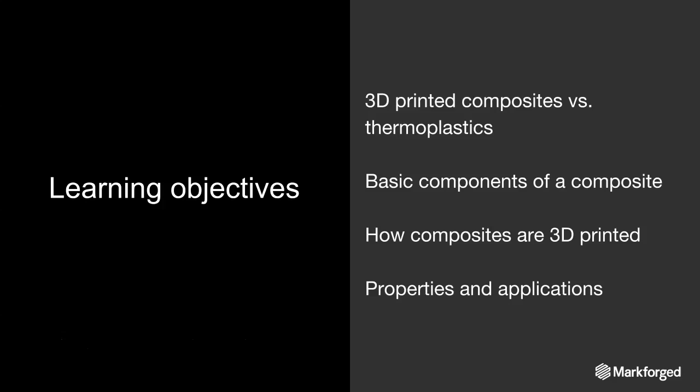And we're going to be talking about 3D printed composites and what advantages they can bring to your production cycle. All right, so by the end of this webinar, you're going to understand the difference between 3D printed composites and thermoplastics, and you'll understand the basic components of a composite. And you'll also be able to describe how composites are 3D printed and be able to name some of the properties and applications of different 3D printable composite materials.

So a lot of you have probably heard of 3D printed thermoplastics. Most materials that are 3D printed fall under this category, and none of them have really proven strong or durable enough for industrial applications, which is why we started 3D printing composites, which outperform thermoplastics in every material property category that you can think of. For example, Markforged's 3D printed carbon fiber reinforcement is more than 8 times stronger than ABS, which is a popular 3D printed thermoplastic. So also included on this graph are nylon and PLA, which are other common 3D printed thermoplastics as well.

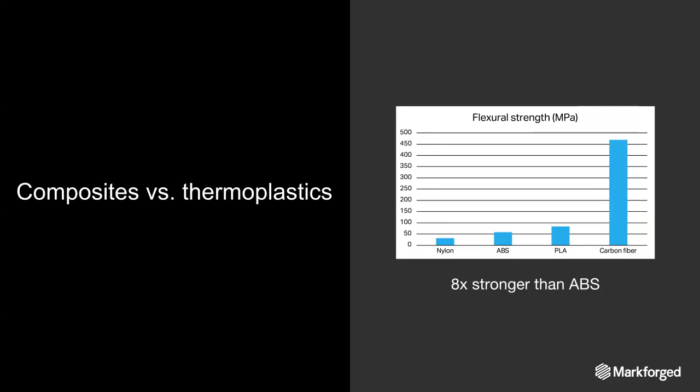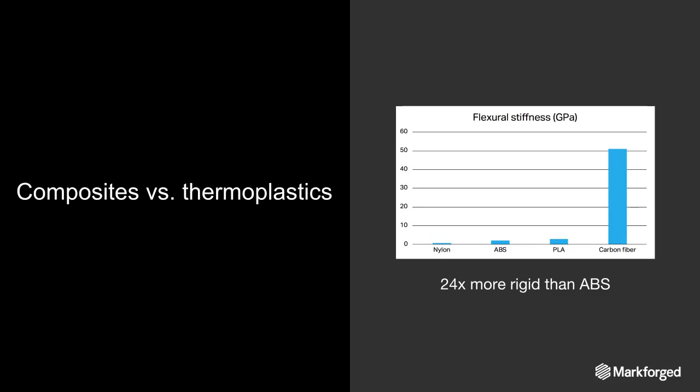When it comes to stiffness, no thermoplastic comes close to matching up with carbon fiber. Carbon fiber is about 24 times more rigid than ABS and around 60 times more rigid than nylon. High strength, high temperature fiberglass, another reinforcement fiber from Markforged, exhibits excellent impact resistance, about 30 times more than ABS. We're going to get more into specific properties of each of these reinforcement fibers later in the webinar.

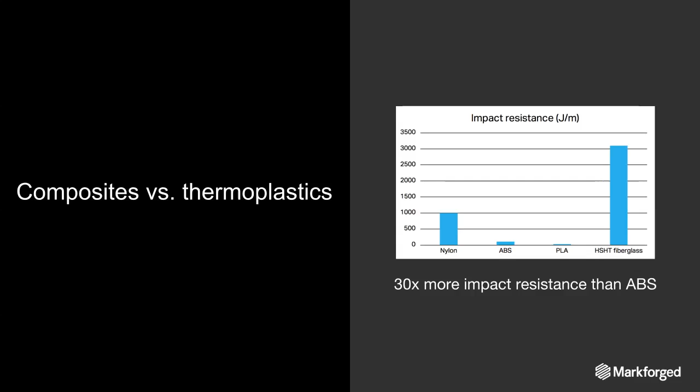But first, I want to cover what I'm talking about when I say composites and thermoplastics and how the understanding that you have already may fit in with the kind of 3D printing that Markforged does. So thermoplastics are plastics that melt when heated and harden when cooled without a change in their chemical properties. They're popular 3D printing materials because they can be easily melted, extruded layer by layer, and then immediately cooled into any desired shape that you want. Most thermoplastics have a relatively low melting point, which makes them easier to print, and are typically very flexible. This picture shows a thermoplastic bending at a 90-degree angle when there's a load applied to the end of it. That really shows that flexibility of thermoplastics.

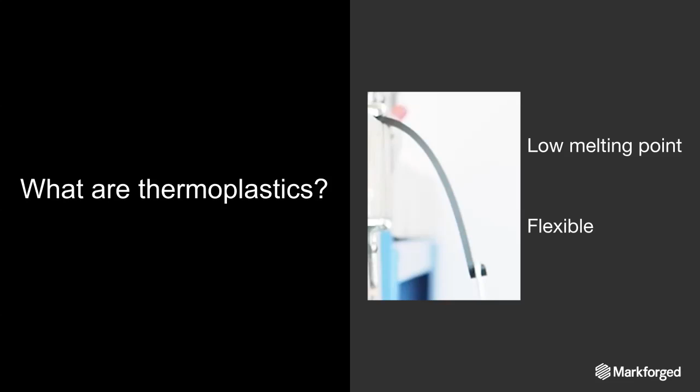Composites, on the other hand, are made up of more than one material that, when combined, have properties that are different from each of those individual materials. So there's 2 main components of composite parts, a matrix and a reinforcement. So for typical fiber composites, the reinforcement, like carbon fiber or fiberglass, for example, is formed into your desired shape and then covered with the matrix, which could be an epoxy or a thermoset plastic. And that helps it retain its shape. So you can see in the picture to the right, the black woven material is carbon fiber, and that brush is applying the matrix to it to make it a composite part. And these methods yield really strong, stiff, and lightweight parts.

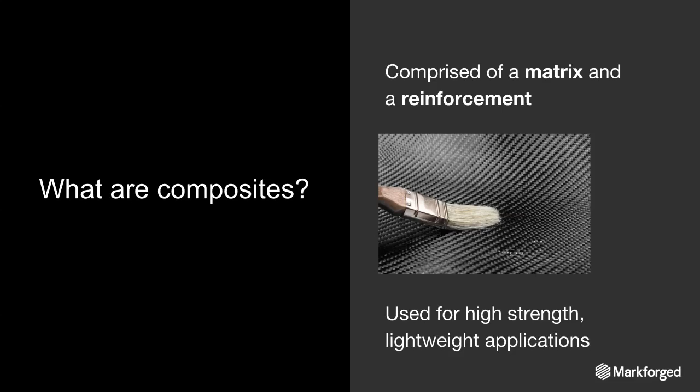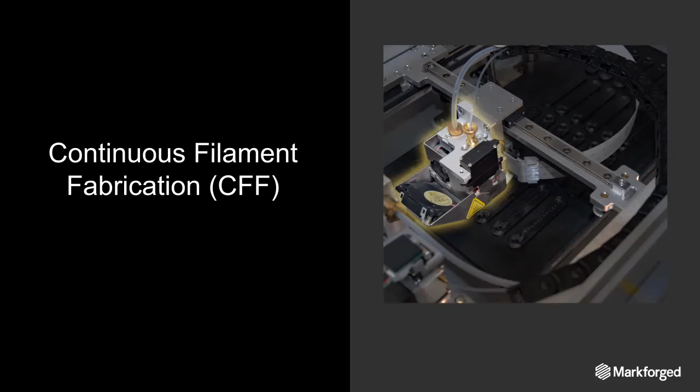So here's a view from above of one of our desktop printers. And right there highlighted in yellow is the print head. And so on the bottom of that print head is where the two nozzles are located, the one that's dedicated to thermoplastic and the other one to continuous fibers. And the two tubes that you see on the top of that head highlighted in yellow are the feed tubes for the material into the print head. So the tube in the front is for continuous fibers, and the one in the back is for thermoplastic.

So this method, CFF, is really what gives Markforged parts the incredible strength. So when loaded, that reinforcement fiber distributes the load along the length of the fibers, while the matrix holds those fibers in place, which allows you to have parts that are actually more rigid than the thermoplastic or fiber alone.

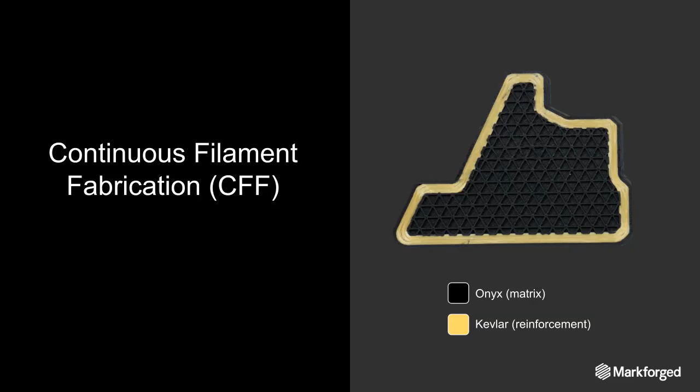Here's a video of that strength in action. On the left of the video is a fiberglass reinforced Onyx beam, and that's printed on a Markforged printer. Second from the left is Onyx, so just the thermoplastic without any reinforcement. And the other two are typical 3D printing thermoplastics, ABS and PLA.

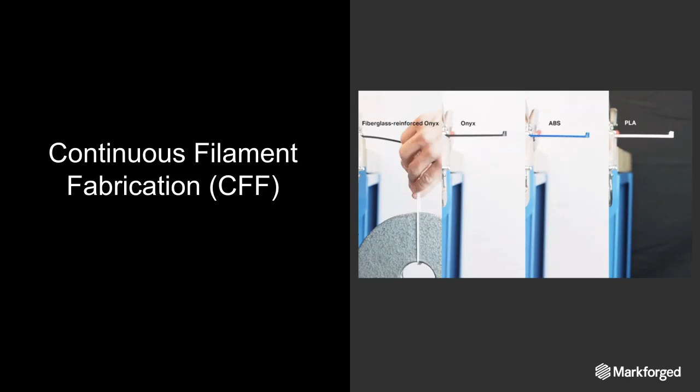7.5 pounds was hung from each of the beams. And while both the ABS and PLA beams snap in two, the composite beam deflects a little bit and then goes back to its original shape after the weight is removed.

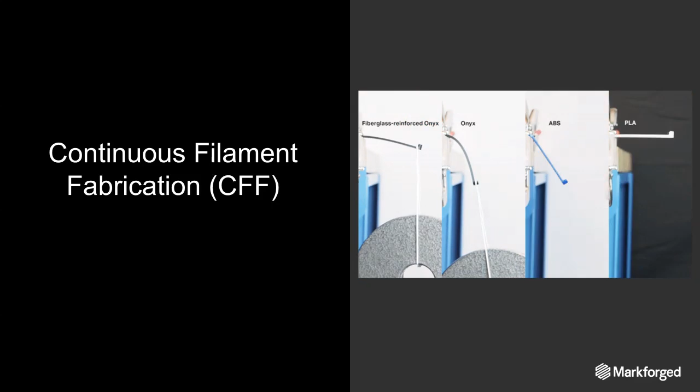The difference between composites and stronger thermoplastics is really well illustrated by looking at that unreinforced Onyx beam. So although Onyx is stronger than most other thermoplastics, when reinforced with continuous fiber, it becomes a lot stiffer and less ductile.

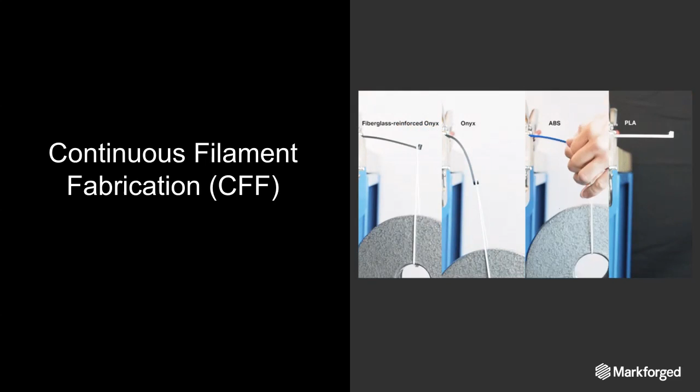So as we've seen, continuous fibers allow for 3D printed parts strong enough for industrial applications, unlike just thermoplastics. And just as with all other engineering materials, it's important to understand the properties of each of these reinforcements in order to know how to leverage their advantages. So now we're going to explore each of Markforged's reinforcement fibers to learn where they can fit into your production cycle.

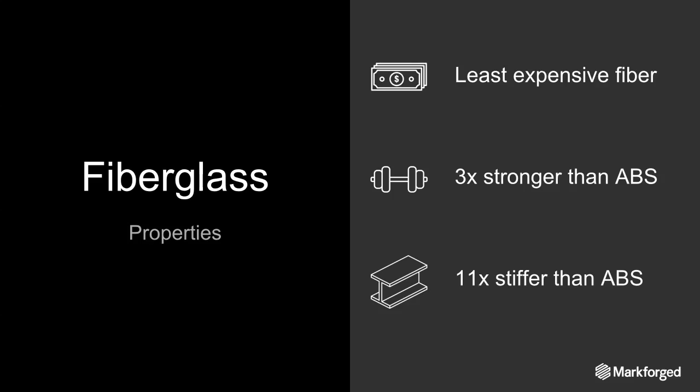The first up is fiberglass. Fiberglass is what we call our entry-level reinforcement fiber. It's our least expensive fiber. And it's already 3 times stronger than ABS and is 11 times more rigid than ABS. And so this is a really good starting point for people who are looking to start printing engineering grade parts. Fiberglass is our most cost-effective one. Here's the video again that was showcasing fiberglass's strength and stiffness.

And then, so fiberglass, because of its really good strength and stiffness, it's a great go-to general use fiber. So when you need more strength than thermoplastics, but not quite the robustness of metal, you can use fiberglass. So example applications that our customers use are functional prototypes, brackets, drill jigs, and soft jaws.

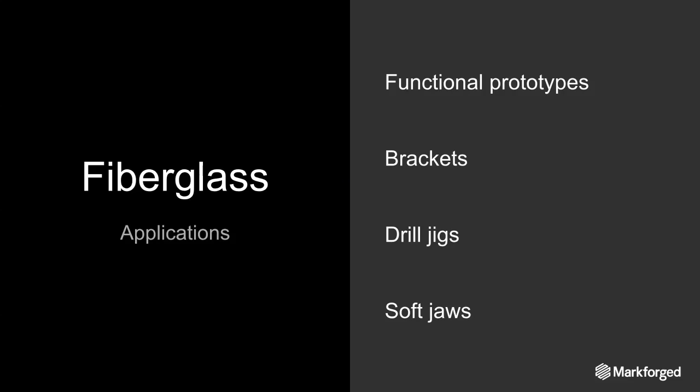So here's an example of a fiberglass reinforced soft jaw in action. So custom soft jaws are a really good way to precisely hold irregularly shaped parts when you want to machine them. So when Onyx is reinforced with fiberglass, the 3D printed jaws are stiff enough to keep the part from moving around when you're machining it, but soft enough to have a non-marring surface so you don't mess up the part from the clamping force.

In this particular case, the jaws are holding a needle bearing housing, which is undergoing a facing operation on the mill.

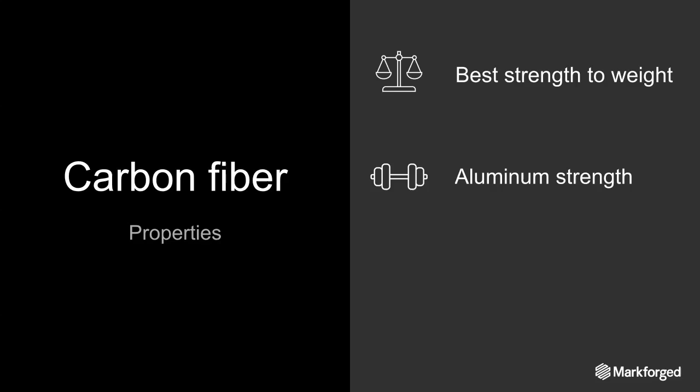The next material we're going to look at is carbon fiber. It has the best strength to weight ratio out of any of our fibers, with a strength to weight 50% higher than that of 6061 aluminum. In fact, the strength of carbon fiber is so high that when we print it, its strength is equal to the yield strength of 6061 aluminum. So what that means is it fails at the same stress that aluminum starts to plastically deform.

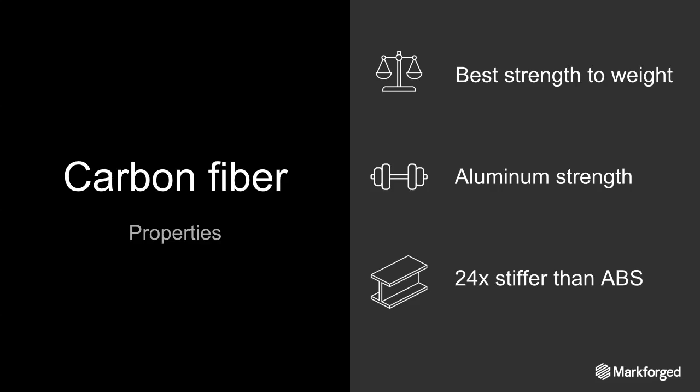It's also our stiffest fiber. It's 24 times more rigid than ABS and 60 times more rigid than nylon. So in this video, 27.5 pounds of weight is hung from a 7-gram carbon fiber beam. And then the same weight is hung from a 12-gram 6061 beam.

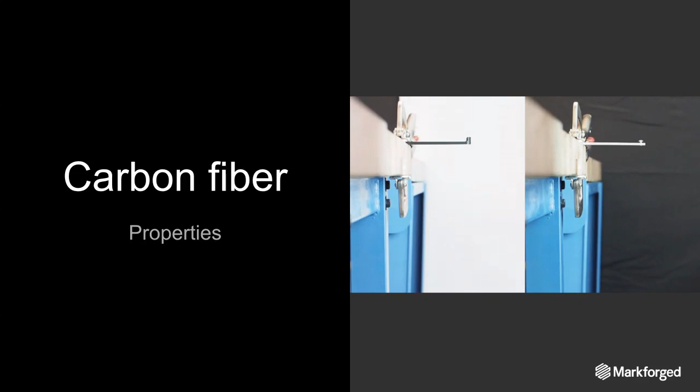And so you can see that the composite part deflects very minimally and then returns back to its original shape when that weight is removed. And that aluminum beam begins to yield as that weight is placed on it. And when the weight is removed, it doesn't return back to its original shape because it has started to plastically deform.

So because of these really amazing properties, carbon fiber is ideal for situations when you want the absolute highest stiffness and lowest deflection. It's strong enough to replace aluminum at nearly half the weight. So our customers typically use it for tooling, fixtures, and end-use parts that would otherwise be machined out of metal.

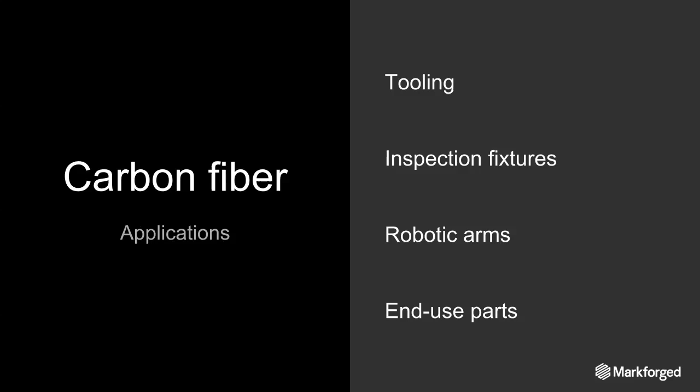So this is one of our customer examples. It's a company called Haddington Dynamics, and they developed Dexter, which is a 3D printed robotic arm, and it's almost completely made out of 3D printed Markforged parts. And they use carbon fiber reinforcement for the arm because it's the only material that's stiff and lightweight enough to keep the precision that they want on this robotic arm, which is 50 microns, just about 0.002 of an inch, is the precision of this arm in 3D space.

Our next fiber is Kevlar. Kevlar is extremely durable, which means parts reinforced with it can really take a beating without failing. It's also 15 to 20% lighter than the rest of our fibers, depending on what fiber you're comparing it to, making it the least dense out of all of our reinforcement fibers.

Kevlar also has the ability to plastically deform without losing strength. So this means a couple things. First, it retains a really high strength while allowing some give in the contact loaded surface. And secondly, it has the least catastrophic failure mode compared to the rest of the fibers.

So for example, carbon fiber, as we talked about, deflects very minimally. But what that means is that it's brittle. So when carbon fiber is loaded to its maximum, it fails completely and basically with no warning. Kevlar, on the other hand, deforms until fibers begin to fail one at a time until it eventually fails. So this provides a lot more predictable and forgivable failure mode.

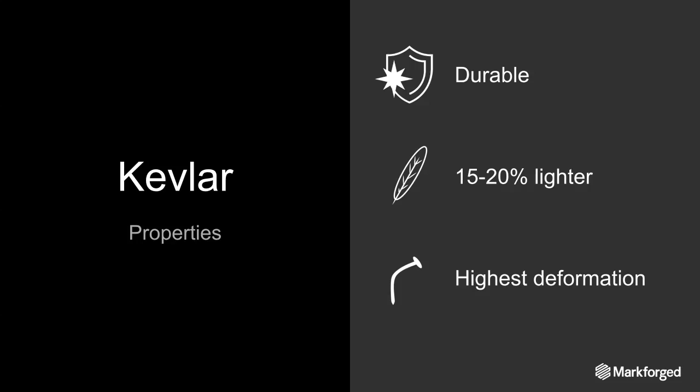Here's a video of me literally beating Kevlar with a hammer. The blue part is ABS and the red one is PLA. And the black is Kevlar reinforced Onyx. So this really showcases that amazing impact resistance that Kevlar has and that durability. It's just completely above and beyond typical thermoplastics.

So because of this really low density and high durability, Kevlar is great for applications involving a lot of motion and interfacing with production parts. So our customers use it a lot of the time for end effectors. One of our customers actually 3D prints the entirety of their crash test dummy skeletons with Kevlar reinforced parts.

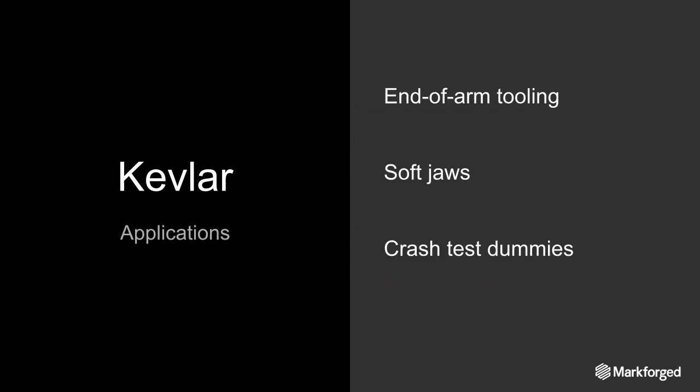One specific customer example is Dixon Valve. They print Kevlar reinforced grippers as end of arm tooling for one of their robotic arms. And this robot transfers fittings between machining centers. And so Kevlar's toughness combined with its low density make for really lightweight jaws that can withstand repeated clampings.

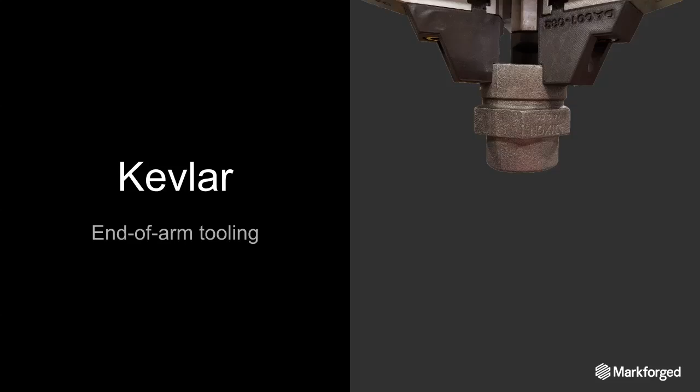So the last material we're going to talk about today is one that's pretty unique to Markforged, and that's high strength, high temperature fiberglass, or we call it HSHT for short. So HSHT has superior heat resistance. It retains its strength at temperatures above 300 degrees Fahrenheit, around 150 degrees Celsius. That's well past most thermoplastics' glass transition temperature and about 80 degrees Fahrenheit higher than any of our other fibers.

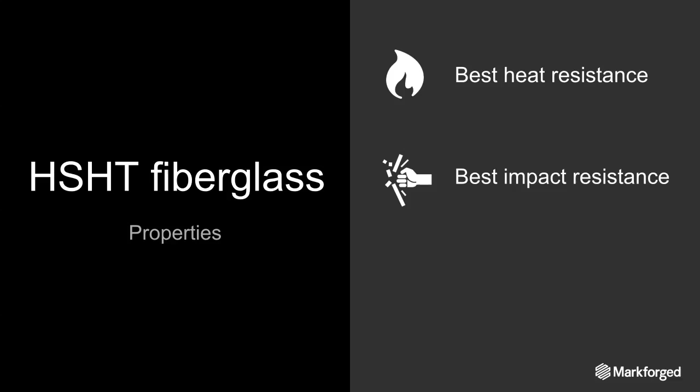HSHT also has incredible impact resistance, 30 times that of ABS, as I mentioned earlier. Additionally, HSHT can elastically deform more than any other fiber. So this is special because as HSHT is loaded towards its maximum, it deflects. And then if you unload it, it will still return back to its original shape, which is what I mean when I say elastically deform. And so this is really helpful for parts that need that high elasticity, or parts that will be repeatedly deflected and need to go back to the original dimensions.

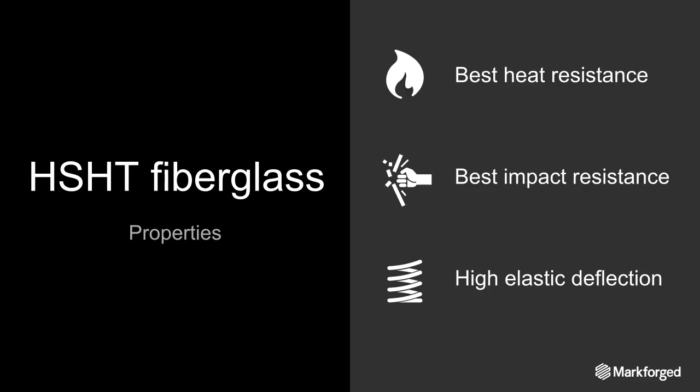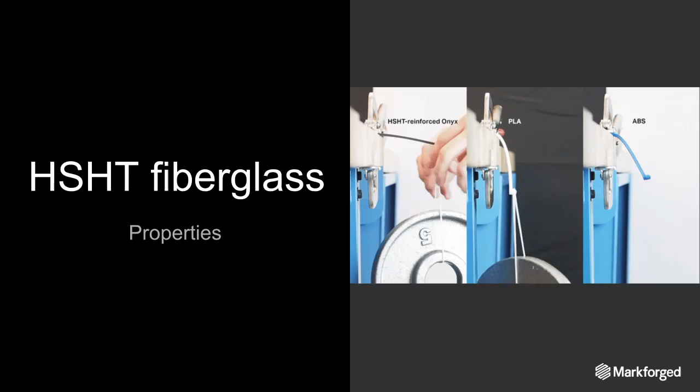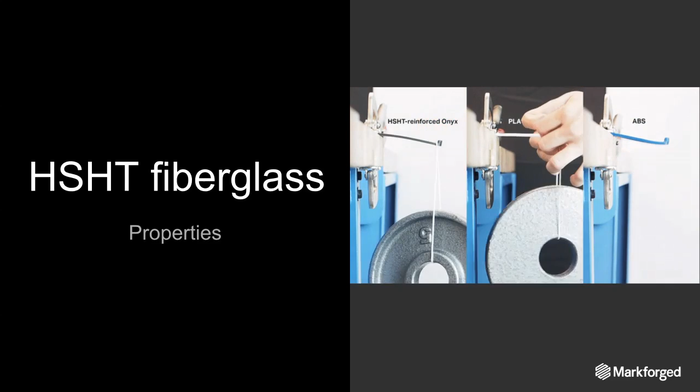So before this video was shot, each of these beams was heated in an oven at 140 degrees Celsius, which is about 285 Fahrenheit. The HSHT reinforced beam retained its strength and stiffness, as you can see, and it was able to support 5 pounds hung from the end while deflecting a little bit, whereas PLA and ABS actually started to deflect under their own weight before the weight was even hung from the end. And then you can see they basically were pretty limp as we put the weight on.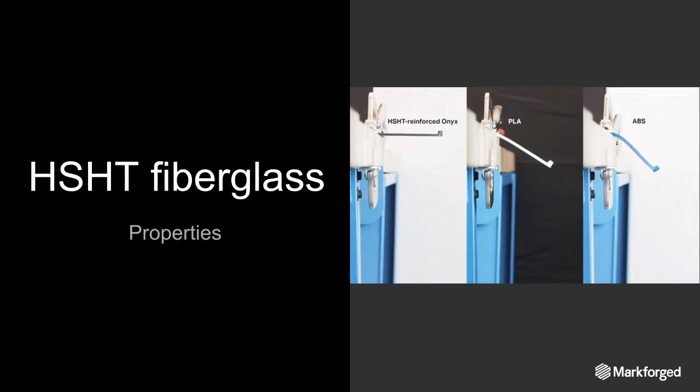And so the thermal properties of HSHT in a 3D printed part really unlock a lot of new applications for 3D printing. Here's some examples of what our customers are doing with it. Welding fixtures are really popular. Thermoforms, thermoset molds, injection mold inserts, and blow molds. And so all of these applications are either high temperature or high impact or a combination of the two. And the reason we can do this with HSHT is really because of that high strength and that high heat deflection temperature.

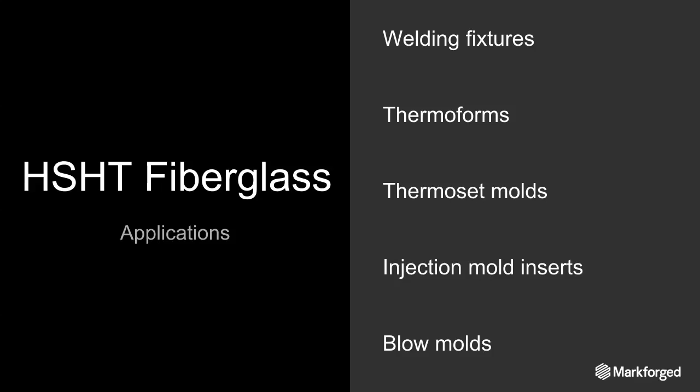So here's a customer example. Humanetics is the leading manufacturer of crash test dummies, and they use our printers to fabricate actually a lot of things in their production cycle. But one thing they do is thermoset molds for a protective neck ring that goes on their adult dummies. And this neck ring is a pretty complex shape, and they used to make silicone molds for it, but those were not durable enough. And so HSHT's ability to really retain that strength and rigidity at high temperatures made it a really good reinforcement fiber for this application.

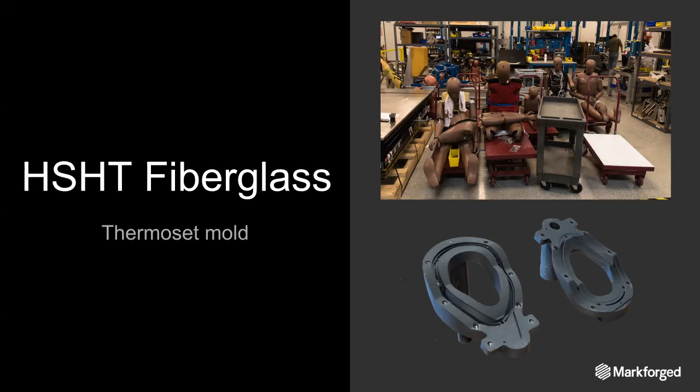All right, so that does it for our webinar on composites today. Whether it's the low density and that high durability of Kevlar or that excellent rigidity that carbon fiber has, 3D printed reinforcements give you really a diverse set of properties that can be leveraged to your needs depending on what fiber you choose. And so now I think we're going to take some time to answer questions from you all.